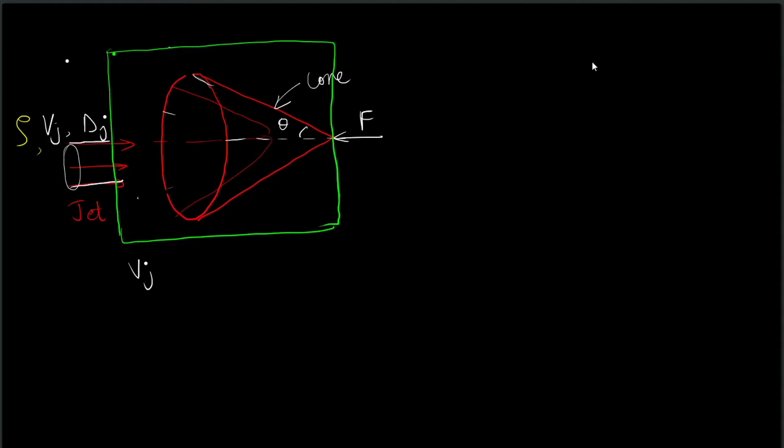Let us take the control volume which contains the entire setup. So the control volume includes the cone. So what is going on in the control volume? So the jet is entering into the control volume through here, and the water is leaving the control volume. So like this. Okay. So the green line, you can imagine, it need not be like this. We can contour the control volume to be coinciding with the velocity of the jet. That is, the control volume is normal to the jets. No problem.

And just with a little bit of thought, you can imagine that even if you choose a different shape of the control volume, the answers won't change. So the control volume has a force F. The fluid is coming in at the ambient pressure, and it is also leaving at the ambient pressure. So no extra forces because of pressure. So let us first do the conservation of mass. So the control volume is stationary, that is, it has no velocity.

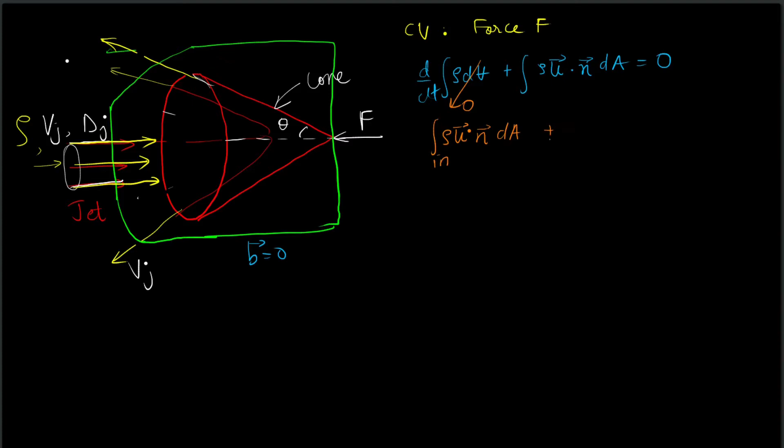So d/dt of integral rho dV plus integral rho u dot n dA equal to 0. So this is the statement of the conservation of mass. I have not written the velocity b in this expression. So this is going to be 0 because the control volume is not moving and it is not deforming as well. Moreover, it's a steady flow. So we have integral rho u dot n dA equal to 0. And this particular integral will comprise of the incoming jet. So integral rho u dot n dA for the incoming jet plus integral rho u dot n dA for the exit. This is going to be equal to 0.

Alright. So what is this expression going to be? It's going to be rho. So because the velocity is uniform, and u dot n cap will have a negative sign because the normal vector at this point is pointing in this direction while the velocity is pointing in. So it will be minus rho Vj times the area of the jet plus this is essentially going to be m dot at the exit, and this is going to be 0.

Alright, so now let us write down the conservation of momentum. Once again, we have d/dt of integral rho u dV plus integral rho u u dot n dA is equal to, not 0, but it's going to be equal to minus F. So we are more concerned with the momentum equation in the x direction because of the symmetry of the problem, there will be no force in the y direction. Okay, so this is the x direction. So because of the symmetry, there will be no force in the y direction. So we are more concerned with the momentum balance in the x direction.

So this term is going to be 0 because the control volume is not deforming and it's a steady flow. So we have integral rho u u dot n dA. So instead of u vector, I'm just going to write it as u. That is, at whatever cross section we are taking this flux, we are going to only take the u component of velocity, and this is going to be equal to minus F. Okay, so what is the contribution of momentum coming in through this part? It's going to be rho Vj times, so these two terms are this, and u dot n cap at this particular point is going to be minus Vj times A of the jet.

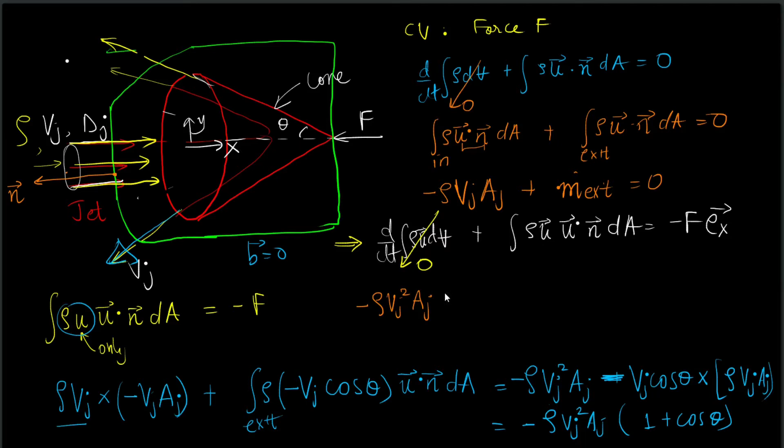So from this we can write minus rho Vj square A jet (1 plus cos theta) is equal to minus F, and that gives us an expression for F. We can get rid of the negative sign, and that gives us the expression for the force required to hold the cone steady. So if you apply this amount of force on the control volume, essentially through the cone, you will be able to keep the cone steady. And by symmetry, there will be no force acting in the y direction.

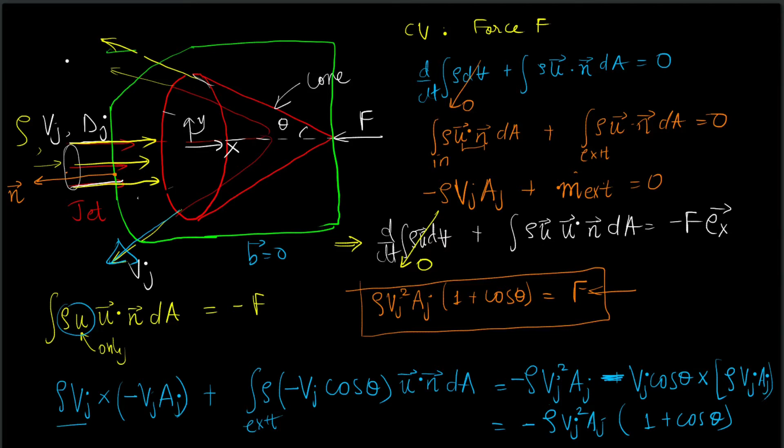The idea developed in this particular problem is quite relevant for power generation. Imagine you have a massive wheel on which there are various buckets connected, and there is a big dam. The dam is at a very large height, and the water coming in is diverted. So the potential energy of the water is converted to kinetic energy, and water is directed onto this bucket by means of a jet. So you have a nozzle like this, and the water strikes the bucket and it encounters a change in momentum.

So if you were to apply a force to keep the rotating paddle stationary, that kind of force you would be able to calculate with the help of the analysis above. And that change in momentum is actually what is imparting a certain torque to this wheel. If you let go of this force, the wheel will start rotating. Of course, once the wheel starts rotating, you can no longer do the above analysis, because in that case the control volume itself would be moving.

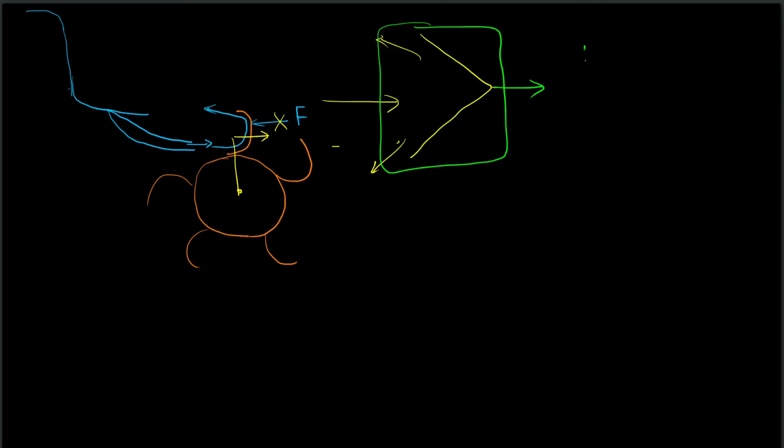So imagine a cup like this, and there is some stream coming in and it is being diverted. Now imagine the cone itself begins to move. Once the cone begins to move, if you consider a control volume which is moving with the velocity of the cone, the velocity b that we had considered to be 0 in the above analysis will not be equal to 0, and you have to appropriately account for that motion.

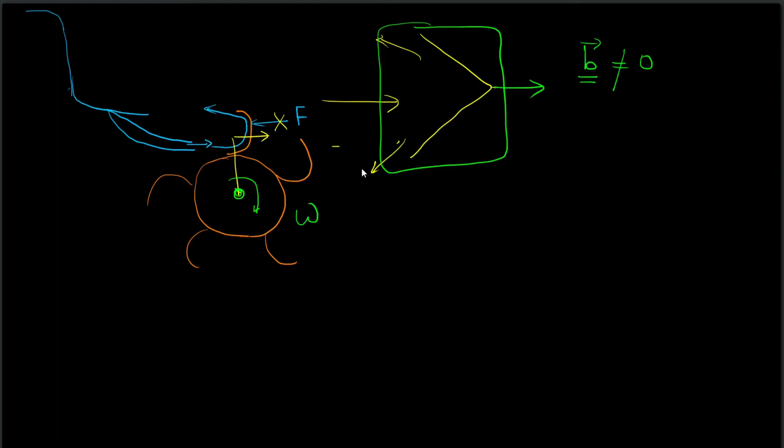So if you assume that the angular velocity of the paddle is omega, the velocity with which the control volume will move will be equal to omega r locally, and that will give you the starting point for finding out how much force is actually being transferred from the water jet to the paddle.

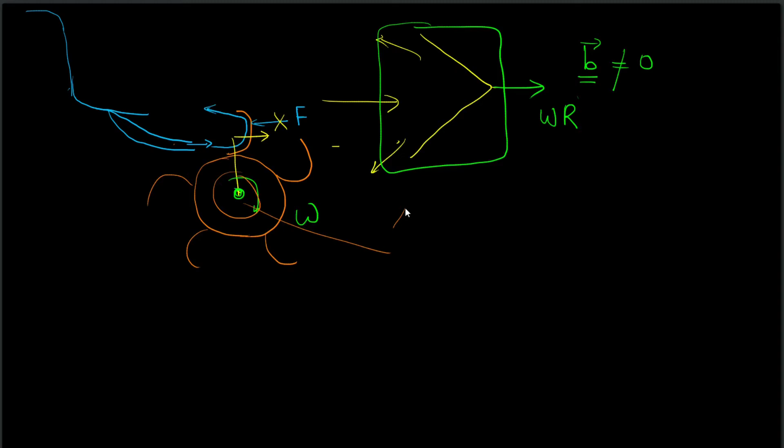And in fact, if you can couple this paddle to a generator in which you have a rotating magnetic field created by permanent magnets which are rotating, and a coil which surrounds these magnets, you will induce electricity by Faraday's laws, and that's how you can generate electricity. And in fact, that is exactly how electricity is generated in hydroelectric power plants.

Okay. So the control volume is stationary and the control volume is not deforming and the entire flow is steady. So I'm going to directly write down the statement of the conservation of mass. It will be integral rho u dot n dA equal to 0. So what are the contributions? So at cross section 1,

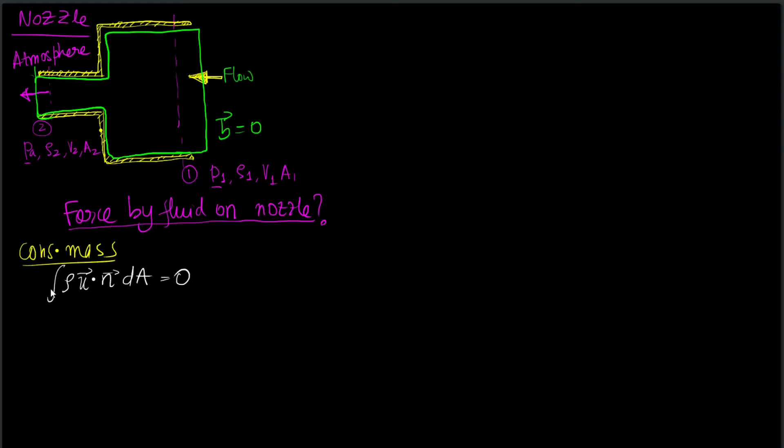let us consider this direction to be x direction. I've drawn the control volume slightly behind, but it's the same thing. One could be over here as well, no problem. All right, so the contribution of this mass at cross section 1 will be rho, then u dot n cap. So the n vector is like this and the velocity is going into the plane. So it will be minus v1 a1 plus, what is the exit flux?

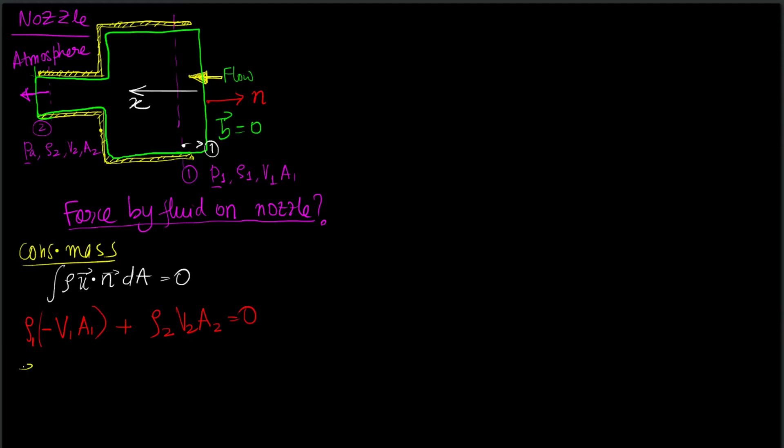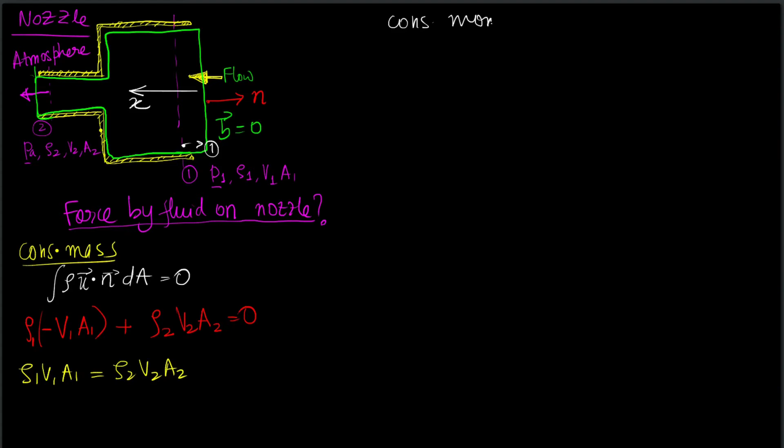So this will be rho 1. So this will be rho 2 v2 a2 and this is equal to 0. And this gives us a relationship: rho 1 v1 a1 is equal to rho 2 v2 a2, which is nothing but the statement of mass continuity. Now what about the conservation of momentum? Again, I'm directly going to write down the statement of the conservation of momentum for a control volume which is stationary and not deforming. So we will have rho u u dot n dA is equal to the force acting on the control volume.

Now let us write down the conservation of momentum equation for only the x direction. So this will be u component of velocity and this will be the x component of the force. For the first cross section, because the x direction is pointing towards the left, this will be rho v1 and u dot n cap at the first cross section will be minus v1 a1. At the second cross section, it will be rho 2 v2 because the velocity is also in the x direction and this will be v2 a2.

And on the right hand side, we have the forces in the x direction and that will be the force acting on the control volume plus the force because of the difference in pressure. The pressure difference is because the pressure at point 1 is larger than the pressure at point 2. So this will be plus P1 times A1. Now this P1 should actually be the gauge pressure.

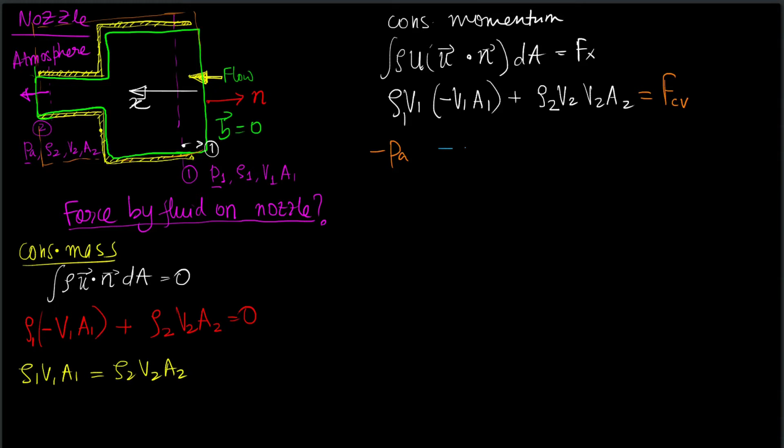We have already discussed that I can imagine another imaginary control volume which spans across the same area. And pressure being an additive term, I can apply a minus PA over the entire imaginary control volume. So the pressure at point 2 will be 0 with this particular offset. The pressure at point 1 will be P1 gauge, which is P1 minus P atmosphere.

So the force acting over here will be plus P1 gauge times A1. And so the force acting on the control volume will be equal to minus P1 gauge times A1 plus rho 2 v2 square a2 minus rho 1 v1 square a1. Moreover, we can take V2 out and get rho 2 V2 A2, and take V1 out and get rho 1 V1 A1, and write both as m dot. So finally, we can write minus P1 gauge times A1 plus mass flux multiplied by the difference in velocity. Alright, so this is the final expression for the force acting on the control volume.

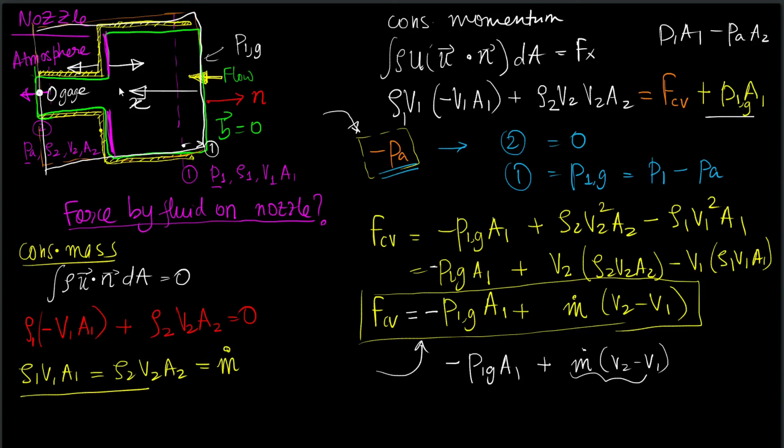Let us consider a problem in which we have a sluice gate, and on one end of the sluice gate we have a level of water at height h1 from the base. The sluice gate can be moved up or down, and depending on the location we can have an eventual jet of water which will have a height h2. If we assume a unit width into the plane, the velocity of exit once the stream becomes parallel is given as v2. So the question is, what is the expression for the force acting on the sluice gate?

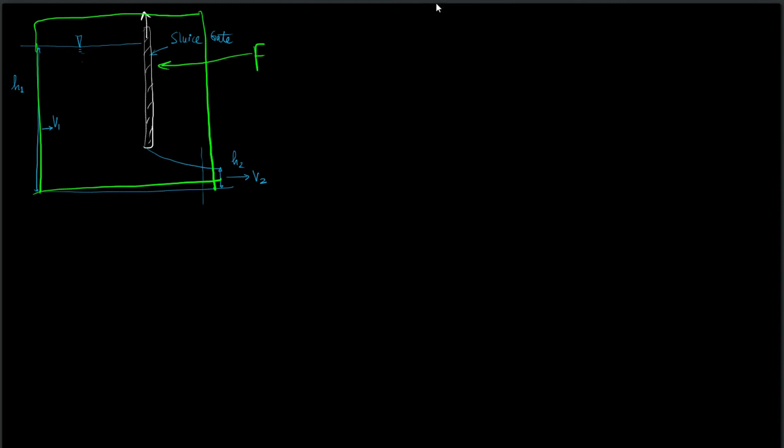So let us consider this particular control volume. In fact, we can consider this entire control volume, no problem. This control volume will also contain the force acting on the sluice gate. So the forces acting on this control volume will be the force on the gate, the pressure of fluid on the left end, and the pressure of fluid on the right end.

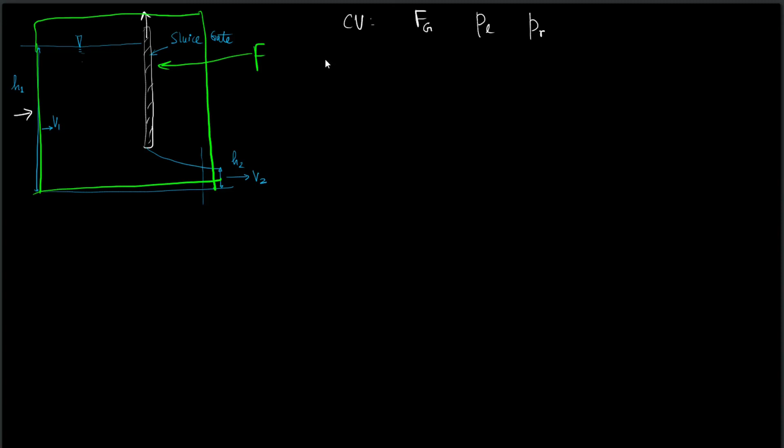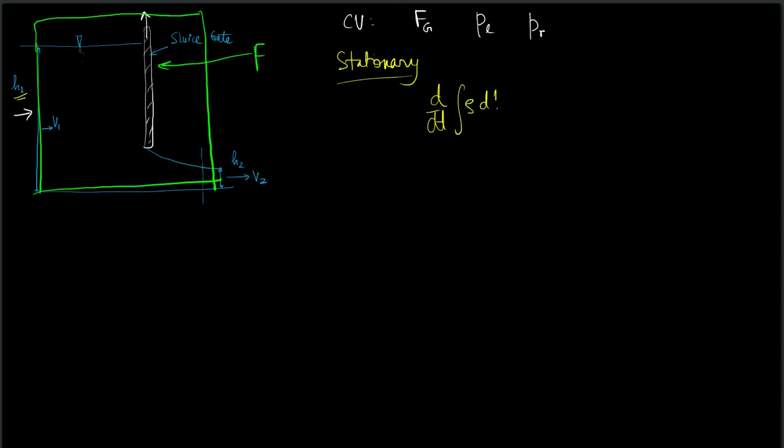So let us first write down the statement of the continuity of mass. The control volume is stationary, and the problem is not going to be exactly steady, but the height on one end is so large that it's not going to change appreciably. So the problem for conservation of mass at least is steady. That is, h1 is not changing in time. d/dt of integral rho dV plus integral rho u dot n dA is equal to 0.

More fluid is coming in from this side to make up for the lost mass. If this was the only fluid you had on this side, then definitely this term would also be there. This term would be negative in fact, because you're losing fluid from the control volume, so this term would not be 0. But because you have fluid all over the reservoir on the left hand side of the sluice gate, this particular term will be 0.

This particular term would come out to be rho. So what is the velocity over here? It's given as v1, but the n vector is like this, so there would be a minus sign, and the area would be h1 times the width into the plane. Plus, what is the exit? It's going to be rho times v2 times h2 times width. This is a positive term because the flux is in the direction of the area. So from this we have v1 h1 equal to v2 h2.

Now coming to the conservation of momentum, once again d/dt of integral rho u vector dV is not going to figure in our equation, simply because the problem is behaving like a steady problem.

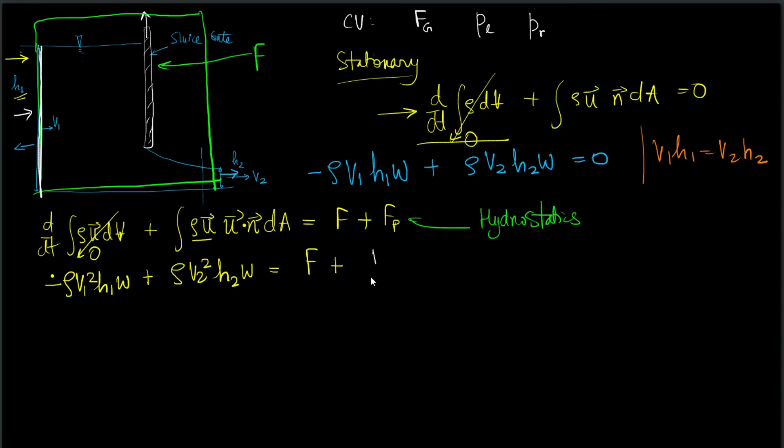So we have already done this in hydrostatics, that the force acting on this entire imaginary area will be equal to half times the area, which is h1 times v1, times the pressure at the base, which is rho g h1. So essentially it's the pressure acting at the centroid multiplied by the area. So half rho g h1 is the pressure acting at this particular point times the area.

So this force is acting in this direction, while on this small face it will be acting on the other side. So it will be minus half h2 v2. Oops, this will not be v, this will be the width. I don't know why I wrote that. So h1 times w is the area into the plane. Okay, so this is the area, this is the pressure, and the pressure at the centroid will be rho g h2. So this gives us an expression for finding out the force acting on the sluice gate. So let us write it down.

So F is equal to, so we can make use of V2 H2 equal to V1 H1. So what will this become? So let us take rho V2 square H2 W common. So this becomes 1 minus V1 square upon V2 square H1 upon H2. And these go on the left hand side to give half H2 W rho g h2 common, 1 minus h1 square upon h2 square.